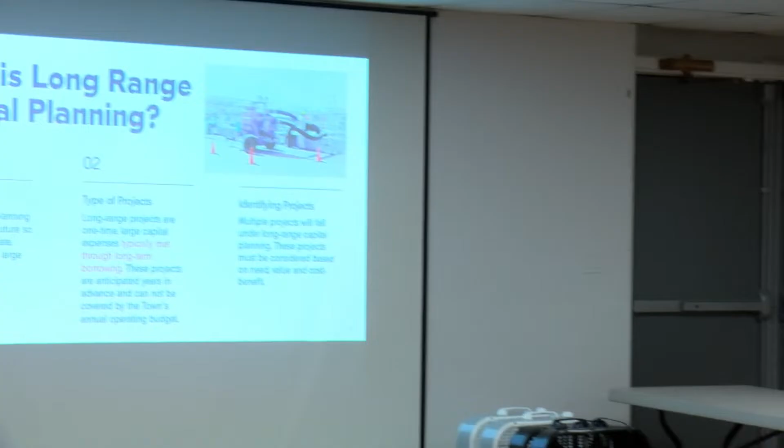As I've done with all of the presentations, I just want to provide some background on what long-range capital planning is. It really is the town looking forward into the future, planning for some large projects over the next 15, 20, 30, 40 years. This allows us to look at the costs, potentially save funds, and really better plan for the future. Because these are such large projects, most of these will be done through borrowing at some point in time.

We've identified a number of projects. As I mentioned, this is the third workshop meeting. The first focused on community service projects, the second focused on schools, and the third here on public works. So again, this allows us to be prepared and strategically plan these large projects that the town will need to pursue.

Potential cost savings as we are more prepared and can plan for the future, and again improve service. At the end of the day, our main priority is providing high quality services to our community at an effective cost. So at this time, I'll turn it over to Mr. Barber for an introduction and overview.

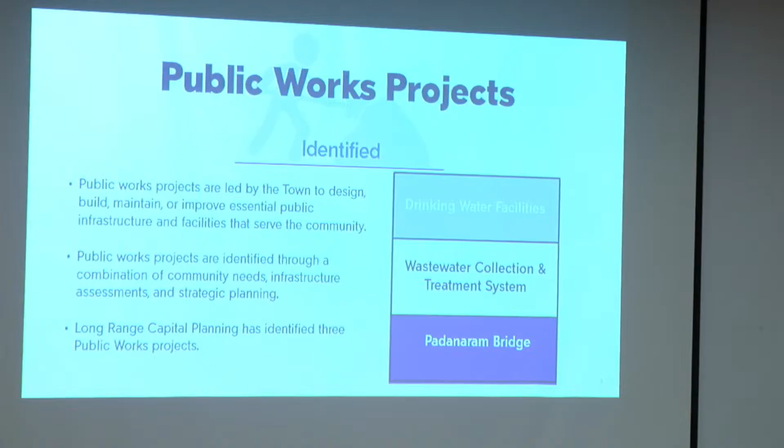Just want to hit arrows. Yeah.

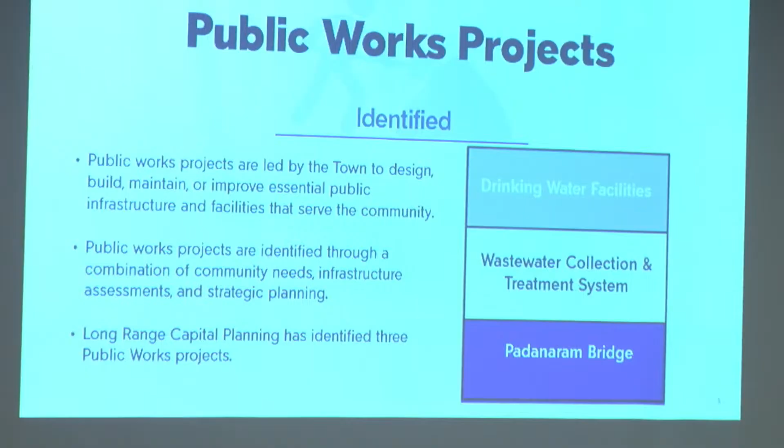These are topics and projects led by the town to design, build, maintain, and improve essential public infrastructure and facilities that serve the public and the community. Public works projects are identified through a combination of community needs, infrastructure assessments, and strategic planning.

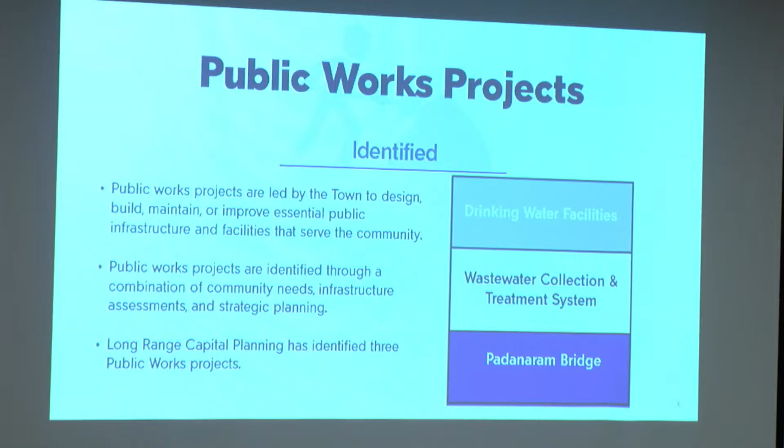Long-range capital planning has identified three public works areas. We say projects, but it's larger than projects, it's basically like three divisions. So, our drinking water system.

We currently serve 10,500 residential and 150 commercial customers with 14 supply wells in 3 different locations in town, with 3 treatment facilities, 5 storage tanks that hold a total of 6.3 million gallons, 200 miles of water mains, 1,662 fire hydrants, and an interconnection with the city of New Bedford for a supplemental supply.

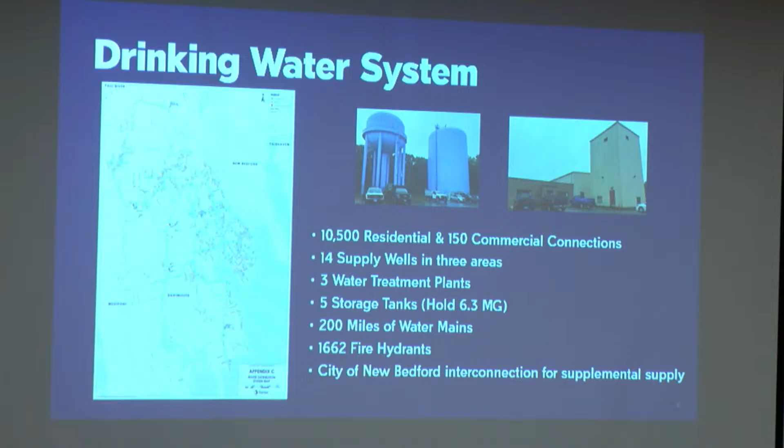A little history of the water system. Back in 1949, we were solely supplied by the city of New Bedford water system, and the average daily demand was 0.7 million gallons per day. In 1960, with a population of 14,607, the average demand was 0.9 million gallons per day. We had installed 2 new well fields, and at that time we were only using about 14% of the New Bedford water.

By 1976, as the population increased to 21,586, our average demand grew to 1.8 million gallons per day. We added new wells and were using about 35% of the city of New Bedford water. In 1981, the population was 24,800, average demand grew to about 2.1 million gallons per day. We added new wells and were still using about 44% of water from the city of New Bedford.

In 1999, population was 28,158, average daily demand was 3.1 million gallons per day. We brought online a new treatment facility, and we were using about 31% of water from the city.

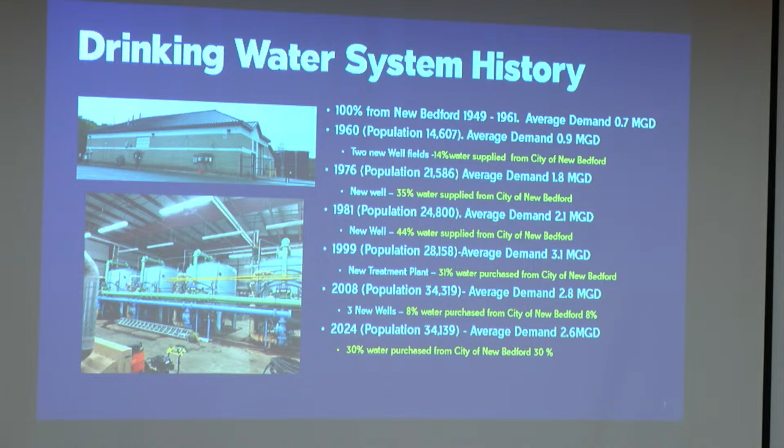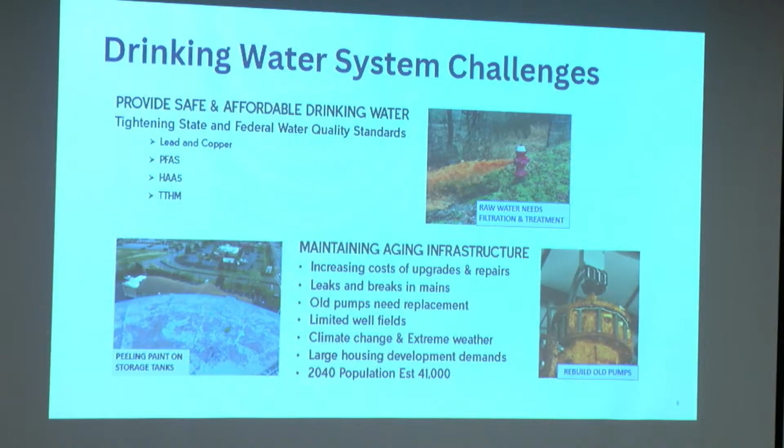Some of our drinking water challenges: as we provide safe and affordable drinking water to our customers and residents, staying up with the tightening state and federal regulations that are ever-emerging for contaminants like lead and copper, PFAS, total trihalomethanes, and haloacetic acids.

Maintaining aging infrastructure, increasing costs, upgrades and repairs, leaks, water main breaks, replacing old pumps, limited well fields, climate change and extreme weather - whether it's dry weather and drought conditions or intense rain that can infiltrate into the wells and contaminate them. Large developments, housing developments, urbanization, and the population projected for 2040 is estimated at 41,000.

Here we have on the bottom left a picture of one of our storage tanks where we have paint peeling, and one of our projects looking forward is to rehab that tank, paint it, and maintain it.

The cost has increased throughout the years, so it's about 1.5 million to paint a tank, or to maintain the tank with a contract over about 15 years. It's about 3.1 million.

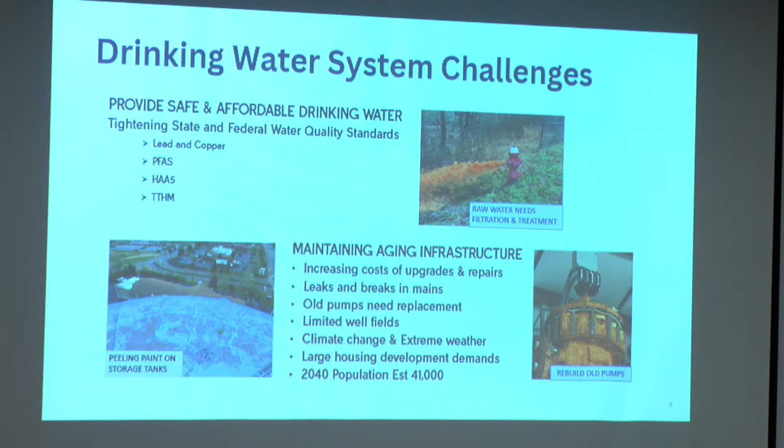Some project costs: our water quality and resiliency upgrades at our treatment facilities in town are estimated to be about 16 million. We have this kind of stretched out in our 10-year capital plan. But that's what we're looking at for upgrading our treatment facilities for water quality and resiliency projects.

Water main replacement: as our older mains keep increasing in age, we have a number of cast iron mains, a number of transite mains, and then ductile. We'll have to start replacing some of the older mains. The cost is anywhere from $200 to $500 per foot.

We're looking at replacing a water main on Route 6, from Faunce Corner Road to Hathaway Road, for the reconstruction project. Just that section of main is estimated around 1.3 million to replace. And then there's our storage tank over here on the right, where we got 1.4 to 3 million.

Up here in the middle is one of our projects that was funded by ARPA. It's our 579 Old Westport Road water treatment facility upgrade. We're upgrading the clear wells, 4 log, and some pumping, piping. We had put an addition on the building. The cost of that project was just over 2.5 million, fully funded by ARPA.

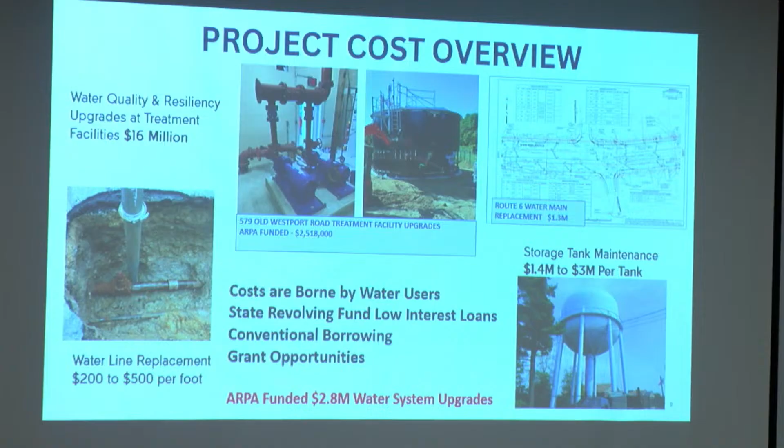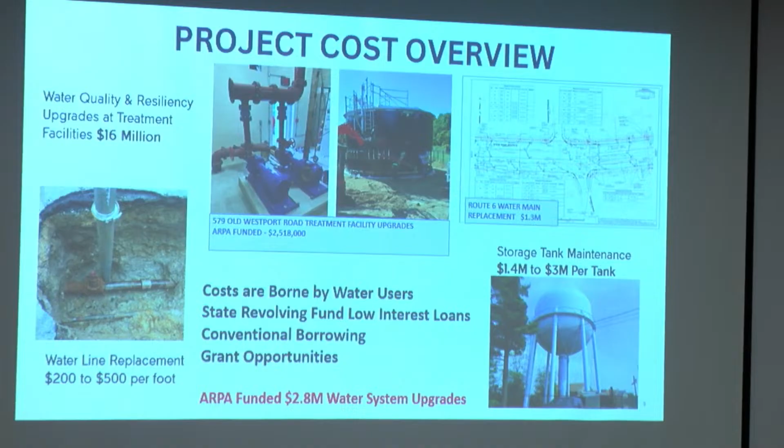We really appreciated that funding that came from Bristol County to fund this project, to get us moving on our quality upgrades and our resiliency. So this project will allow us to reoperate a couple of our wells located at the Pinelli well site that are currently off due to intense rainfall that contaminated two of our wells back in 2020.

So most costs, since we're an enterprise fund for water, are paid for by the ratepayers, right? So the only other way to fund a lot of these projects is either by grant opportunities, state revolving fund, or conventional borrowing.

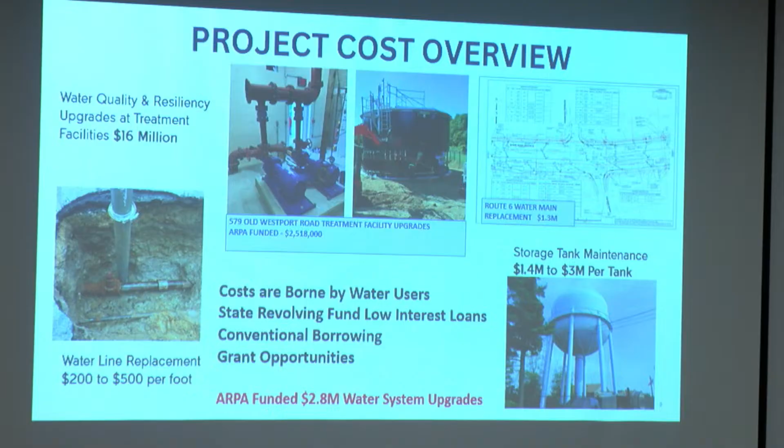So onto our wastewater facilities. On the left, we have kind of a flow diagram of our wastewater treatment facility, where it comes from the collection system into pump stations, through our grit and screening chambers, into clarifiers, separates it into effluent and sludge.

And we aerate and continue to treat with ultraviolet until we discharge back out to the bay, and then the sludge goes through its dehydration or dewatering process into the composting facility, where we heat it to high temperatures to treat, and then mix it with all of our brush and chippings and wood chips, and then ship it out.

So a little history on our treatment facility: in 1970, the original facility was completed. At that time, the population was about 18,691. In 1981, our collection system had increased to about 62 miles of sewer collection, serving about 4,400 connections, with 4 lift stations and a planning of an expansion, and the population was then 24,800.

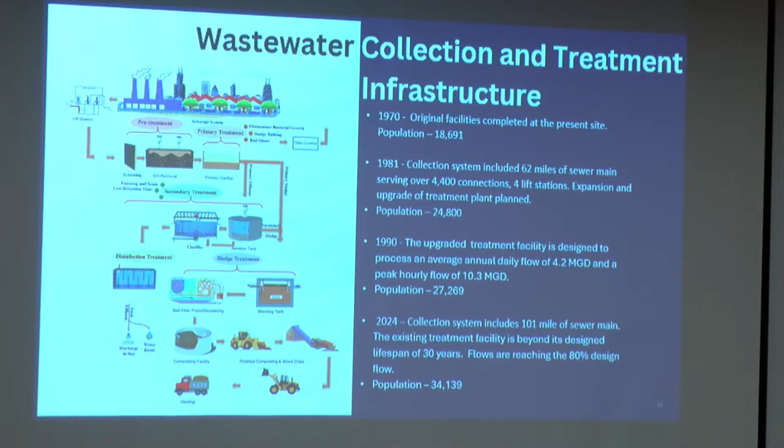Some of our challenges here at the wastewater facility are system capacity, as we have urbanized development, growing population, and increasing demand; structural deterioration, as our old aging buildings and materials corrode. Here's a picture on the right of our composting facility, which is very corrosive. So even the structure and all the piping needs to be rebuilt and replaced.

We have aging and failing equipment, high energy consumption, as our electrical costs climb through the roof. It costs us a lot more to process through the entire treatment process, ultraviolet, the high heat that's needed in the compost facility, and running all the pumps and all the variable speed drives. Stricter environmental regulations, ever-emerging contaminants, nutrient removal limits, non-conforming development flows, and large development projects.

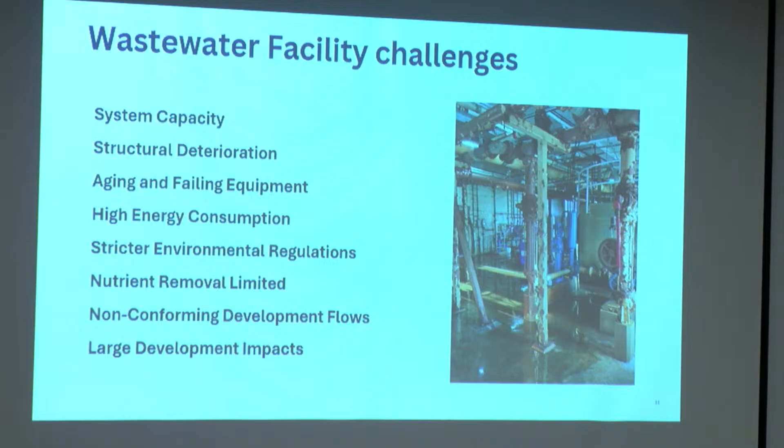So here we are at a facility design process. We're working on our comprehensive wastewater management plan, evaluating the existing conditions, the capacity and conditions, and other sources of wastewater treatment.

Estimate future needs: residential, commercial, industrial, and emerging treatment regulations. The preliminary design, 25%, alternatives with rough cost estimates, and identified preferred alternative. Design preferred alternative, 75% design. Permitting process, and identify financing at that point. And the final design, 100%, with a bid package, funding agreements, and then we move to construction.

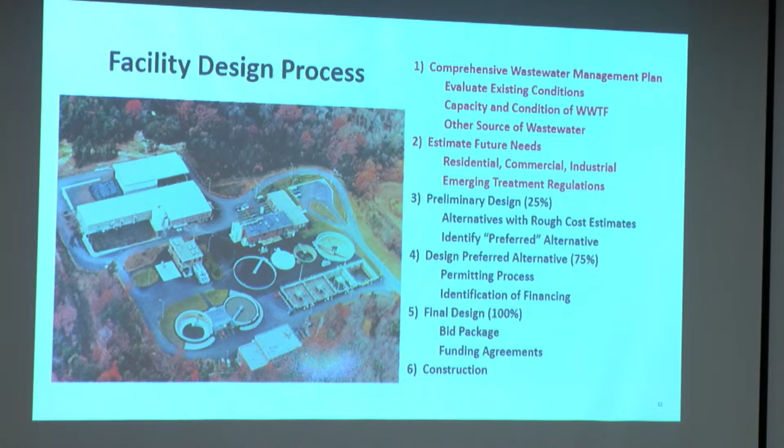Where are we now? We're currently at the comprehensive wastewater management plan. We have put together an RFP or an RFQ so we can send out and get qualifications and proposals from consultants to complete the updated comprehensive wastewater management plan.

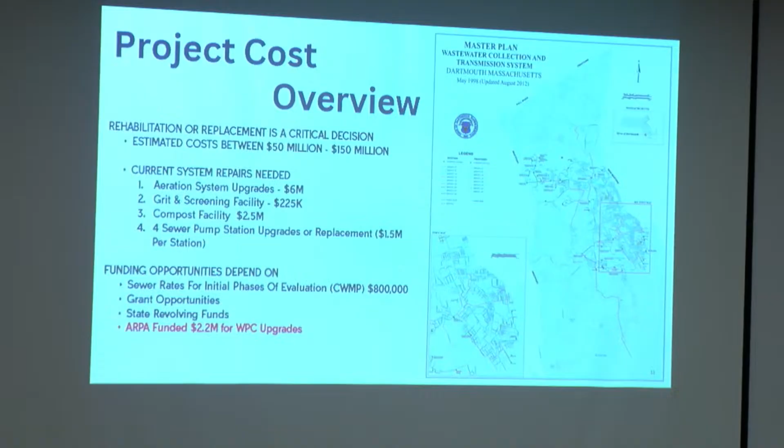Project costs: rehabilitation or replacement of a wastewater treatment facility is estimated around $50 million, so 50 million plus. How do you estimate that cost? The industry standard, a couple years old, was $12 per gallon per day of sewer that we treat. At that rate, it's approximately 50 million.

That's a couple years old, and there are other aspects that go into the reconstruction. If we're looking at increasing the permitted flow or capacity of the plant from 4.2 to either 6 or 8 million gallons per day, you multiply that times 12 and the cost increases.

Current repairs that are needed: aeration system upgrades, estimated cost $6 million. Grit and screening facility upgrades, estimated cost around $225,000. Compost facility reconstruction, about $2.5 million. And four pump station upgrades or replacement, which comes out to about $1.5 million per station.

We recently submitted a bid or request for bids for 2 pump station replacements, and the bid came in at over $3 million. That project is to provide capacity for housing for a 40B housing project. So just to increase that capacity at those stations is about $3 million.

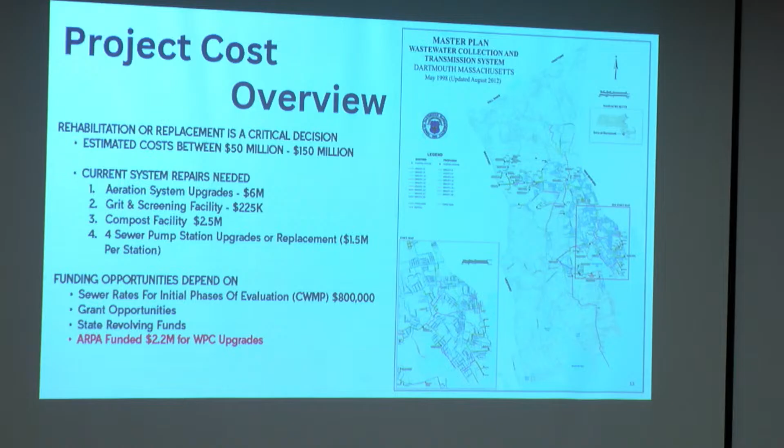Our Padanaram Bridge. A little history on the Padanaram Bridge. In 1828, the Dartmouth Bridge Company was established, and they put together a design and built the Padanaram Bridge between 1834 and 1836. Then in 1870, the town of Dartmouth purchased the bridge from the bridge company for $5,000. Seemed reasonable.

In 1901, construction of some stone piers and railing upgrades on the bridge. In 1920, there was a reconstruction of the drawbridge funded by the town, approved with $22,500. In 1936, they constructed the new center pier and draw. Through 1938 and 1954, there were damages sustained through multiple hurricanes, which closed the bridge for a period of time. In 1955, the bridge opened back up after the repairs were completed.

In 1968, Padanaram Bridge reconstruction plans were drawn up, and there were further upgrades on stone piers and railings. Up on the left here, we don't know the date of that picture, so it's got to be somewhere between 1834 and 1870, or even maybe close to 1901. The bottom picture was in 1936, when the new center pier was built with the new deck in the draw.

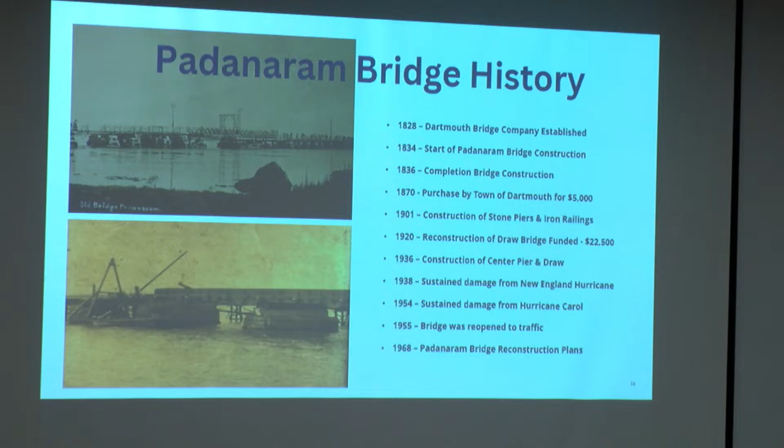In 1996, we had the bridge rehabilitation project, which was 1.3 million. Causeway rehabilitation in 2018, that project was bid for 8.3 million but it went over budget. 2018 bridge repairs were 1.2 million, where we rebuilt and mortared a lot of the center pier, and they did a lot of concrete work.

In 2025, we are planning an expansion joint project that was partially funded through an ARPA earmark, and that cost is about $300,000 for that work. And we're still around pre-25% with the rehabilitation or replacement design that MassDOT has contracted with the contractor Majewski and Masters to do. So we haven't seen much in updates for that, either for the direction, whether they're going to go with a rehabilitation, replacement, or any estimates and costs.

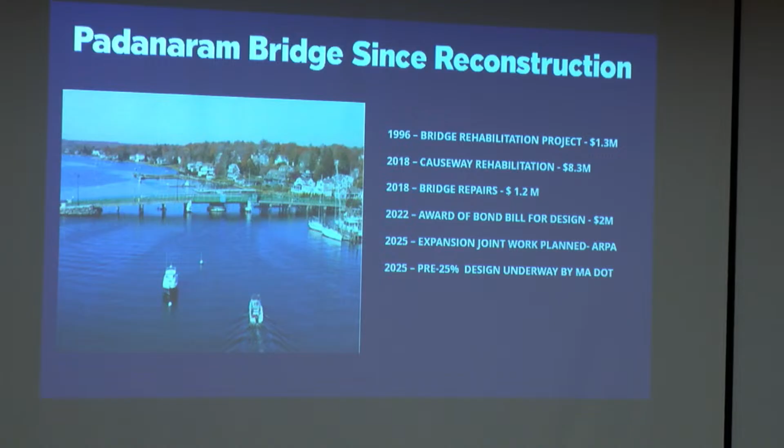Some challenges with the bridge: high maintenance costs, corrosive environment, frequent breakdowns, a lot of emergency repairs, heat expansion issues, mechanical failures and electrical failures all go hand in hand. When the bridge expands too far and we try to operate it, it rubs on the sides as it spins. When you force it with the jacks, it'll either blow an electrical circuit, or the jacks fail, or the motors fail. So a lot of times when you see the bridge stuck, that's the problem.

Up top left is some deck repairs on the bridge. Bottom left is temperature control - our guys are out there with water trucks hosing the deck down, trying to keep the temperatures down as much as we can to keep the bridge from expanding, so we can operate in hot weather. Sometimes it works, sometimes if we have really radiant sun and high temperatures, we can't keep up.

Top right is a picture of the center pier. If you look closely, you see there are two jacks with the motors, you can see from this side, and that's usually what we see fail. At the bottom is a zoomed in picture of one of the bridge jacks.

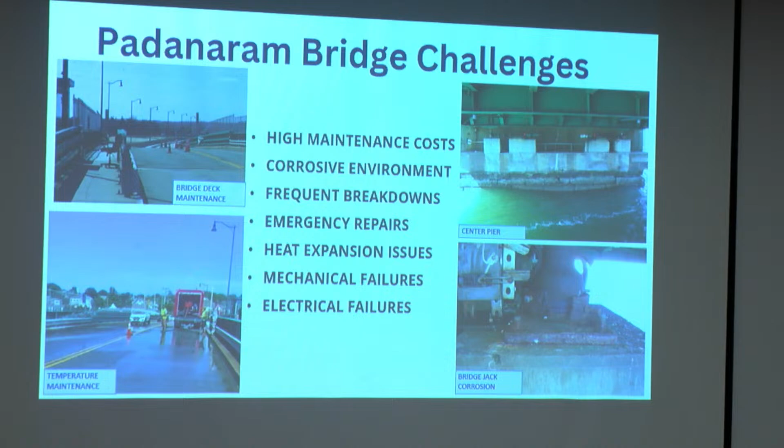If you compare this to the picture from 1936, you can see that the old deck was a lot lower. So the bridge pier is the same, a center pier, but there's a raised section with the updated mechanicals and the updated deck.

Back in 2020, replacement costs were estimated at $20 million for the bridge, and I'm sure it's inflated since then. In 2022, the bond bill was earmarked and awarded $2 million towards the design of the bridge, which gave Mass DOT the go-ahead to move forward with the design.

It includes either the repair, rehabilitation, or replacement, and funding could include federal aid through the Bridge Investment Program, called the BIP - it's always a possibility - or municipal borrowing. Once we get to a higher percentage of design, somewhere in the 75% range, they'll start looking at funding possibilities. You can also reach out to our state reps and senators to request additional earmarks for the construction of the bridge.

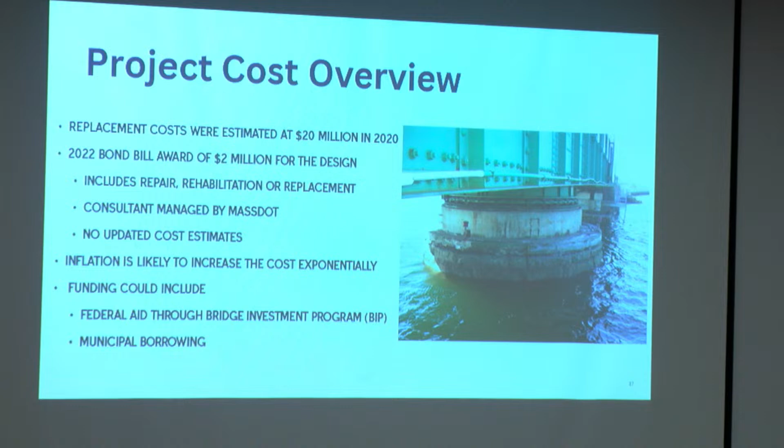Some other payment options: debt exclusion, grants and funding. We don't have a timeline, unfortunately, on the bridge - we're at their mercy. Anytime we do get updates, we'll share them.

Very good. Thanks, Tim. That was great.

I just want to mention, the focus tonight is capital expenditures, and we recognize there may be some concerns regarding operating budgets and operational concerns. We have a team devoted to doing that - we've put together a budget advisory group, which consists of 2 members of the school committee, 2 members of the select board, 2 members of the finance committee. We have our Board of Public Works taking a very active role, our select board, and our finance committee. But the goal of this really is long-range planning, which Tim has highlighted several projects here tonight regarding our public works - some of which could fall under the general fund, some under our enterprise funds. So with that, we'll open it up to any questions from the audience, for myself or Tim or anyone else here tonight.